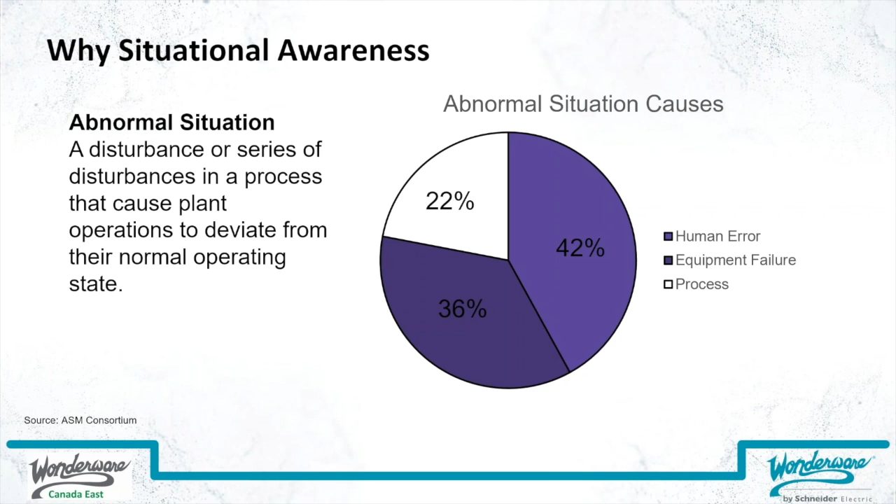So when we look at situational awareness and all of the things that are available today, today's technology capabilities allow us to do just about anything we could possibly need to do. When you look at the release of ArchestrA graphics many years ago, and the functionality of ArchestrA graphics, being able to tie those very comprehensive graphics to real-world information allowed the ability to create very realistic 3D type equipment. With millions of different shades of colors, things could be in different states with 15 different colors to indicate the different states.

Well, that's a problem for me since I'm colorblind, but the other things that were capable in there is the ability to take that real-world information from a controller that came into System Platform and linked to the ArchestrA graphic, or even other traditional HMIs, and be able to do things like animate flames, or animate flow controls, or show motors that are running, fans that are actually spinning, water that's flowing. That list goes on, and I've seen many examples of this.

I watched somebody in an application, they spent about 2 days on something that was just the amount of water animation that came through a gate in a dam, and how to make that look the way it actually should.

From a manufacturing standpoint, there's this whole move to like paper on glass. Take all the things that were on paper and put them on a screen and make them electronic. Well, we kind of did that years ago in this industrial industry with equipment on glass. So essentially, the example that you really see there is just equipment on glass.

And it had a lot of advantages at the time, because certainly if I needed to add a new selector switch or a new push button, it was a lot easier for me to just put it on a screen, put a couple of rungs of logic in a PLC to make it happen, than it was to punch a new hole in the console and acquire the button and wire the button and put the logic in the PLC. So there were some advantages to it. It was just taking the physical world and the equipment world and putting it on glass.

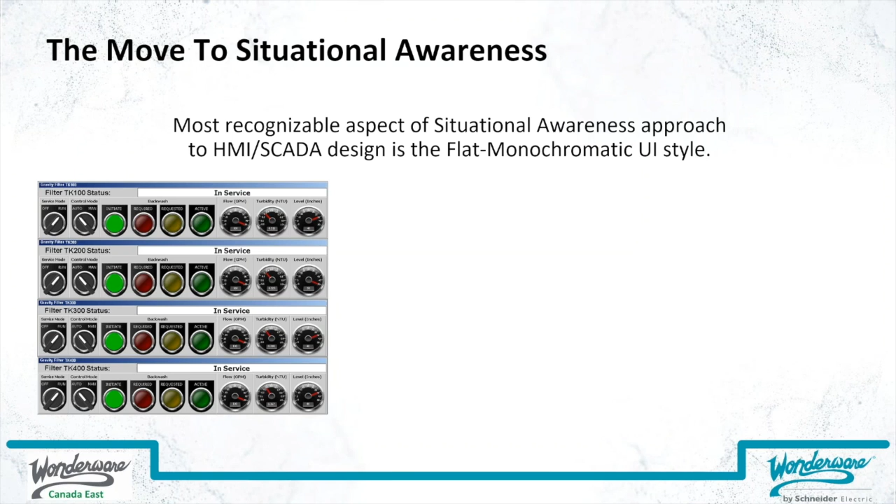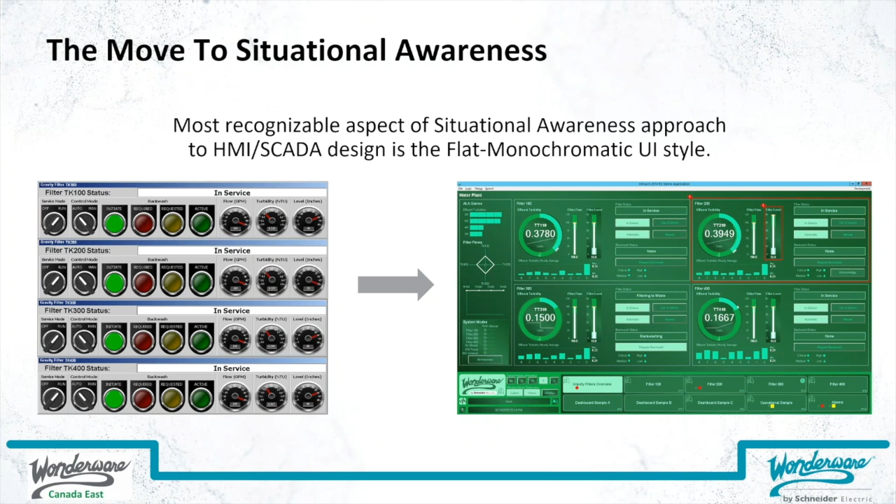Beyond that, it didn't provide a lot more value, other than there could be a lot more information displayed in a smaller area. So when we look at the approach of situational awareness, we see things like this. And we see this design as this flat monochromatic UI style that at first may not look like the best. This is just an example of a demo of a water application.

So when you look at this application quickly, don't worry about the colors, because everything that we do within the ArchestrA environment and the situational awareness graphics is all theme-based. So you can determine what the content is going to display with a simple switch, and you can change your entire application. So this one happens to be this kind of green monochrome, but it could be gray, it could be blue, it could be any colors that you want with a simple switch of a button.

But when you look at something like this really quickly, your attention is drawn to filter 200. Because we utilize some of the alarm severity capability that's built in the System Platform, and that capability being based on functionality written up in the standards, which I'll talk about the references at the end, we immediately tell the operator or the user of the screen that, hey, there's a problem with filter 200. And then I immediately move and look at the level, because that seems to be what's in the alarm.

And of course, if you happen to not be colorblind, you can see it's red. If you are, then that red diamond, just the diamond shape with the number 1 in it, tells me that, hey, this is a severity 1 alarm, and it's something I need to deal with.

If I was not on this screen, down towards the bottom of the screen in the navigation area, I can provide that same information. So I can see on the filter 200 navigation button that there's a criticality or severity 1 alarm in that area, and if I click on that, it would bring me directly to that detailed screen, or I happen to be looking at the overview screen so I can see that information as well.

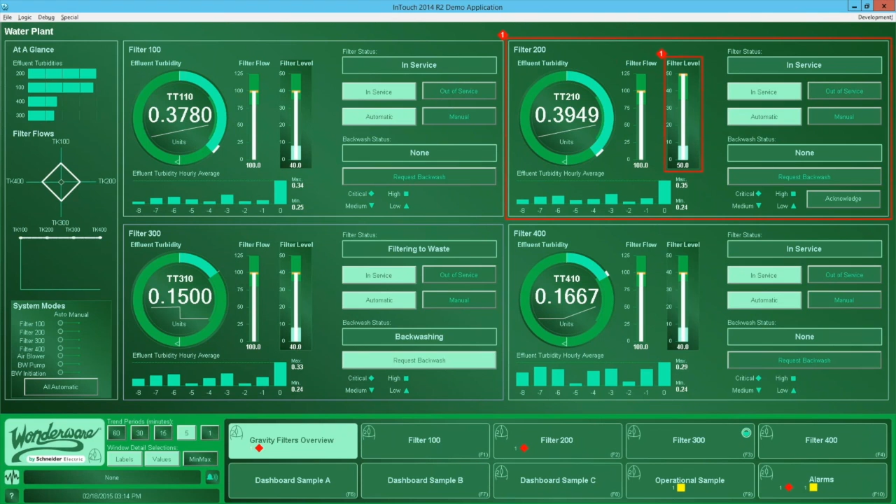So a lot of these concepts aren't really new, right? If we go back and look at some funny things from the past, and you think back to some old Star Trek episodes, you see people sitting at consoles, and those consoles were completely made of glass, and they're sliding and swiping their fingers across things. Back then we kind of thought that was science fiction, when now we all walk around with these smartphones and do the same thing every day.

So where does this kind of fit into what we look at today? That's kind of a model approach to looking at the equipment. So level 1 being an area-wide overview, right? That's something like if I was the entire space station, then that would be the level 1 area-wide operation. What we may have just been looking at would be maybe a facility-wide overview. So it's just the shuttle bay operation.

So, at level 1, I have a goal when I'm going to look at something, and I want to see KPIs. I want to see some summary status. I want to see things that me as a manager or as an upper level person in an organization, in that whole area of the plant, what is it that I need to deal with? What is the situation that I need to go in and react to? And then the level 2 facility-wide is basically key operating screens, any kind of specialty pages around what's going on in that particular area of the plant.

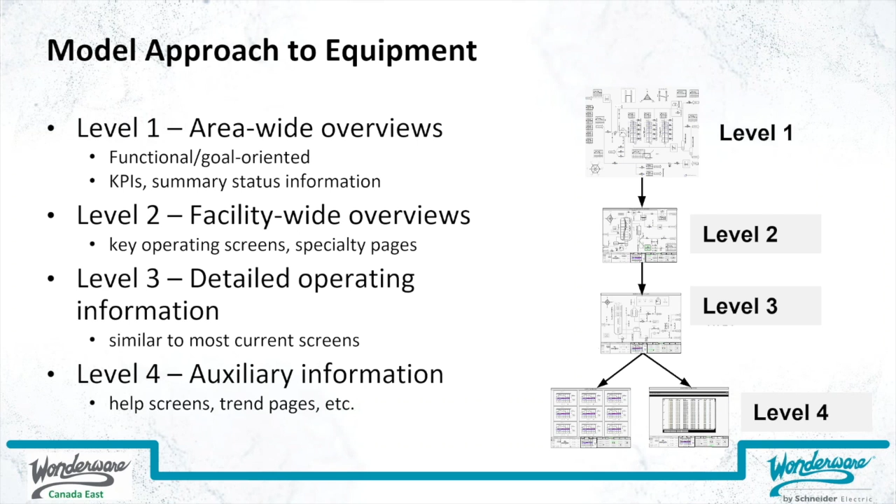So that's something that you'll see, if you get to go to Orlando or you get to come to the upcoming shows in Toronto and things like that, we'll show a lot more detail about this. But how all this information can be automatically related in as part of the model and part of the next generation visualization.

So when we look at the information or the data that's available, data really doesn't do anything for me without any context. By the way, it's 70 degrees. And that doesn't really matter to anybody because you don't know where I am, and you know what the temperature where you are might be. But there's no other information around that. And you don't know the humidity and you don't know whether I was talking about Celsius or Fahrenheit. So without any context around that, it really doesn't mean anything. And when you do that, you force people or operators to try and remember things, search for things, or even worse, make calculations or interpretations on their own on the fly, which could run into problems. So data without context isn't very good.

The pressure is 989.7. What pressure is that? Well, it's just a pressure indicator. I don't know where it is. I don't know what it's supposed to be. I don't know what it is if it's bad. It could be, 990 kPa is a really bad number. Well, I don't know that by looking at this, but I'm very close to that. So how far is it from my set point? Is it close to being alarmed? Is it inside my normal operating range? These are really, really important things that I need to know to be able to make decisions.

So at best, this is an inconvenience because I have to do this interpretation of that data myself and turn it into information within my brain. But during problems, it just relates to a slower response time, which causes more problems. So things start to cascade as there are problems with the system. So being very aware of the situation is always going to allow me to react faster to any kind of upset in the process.

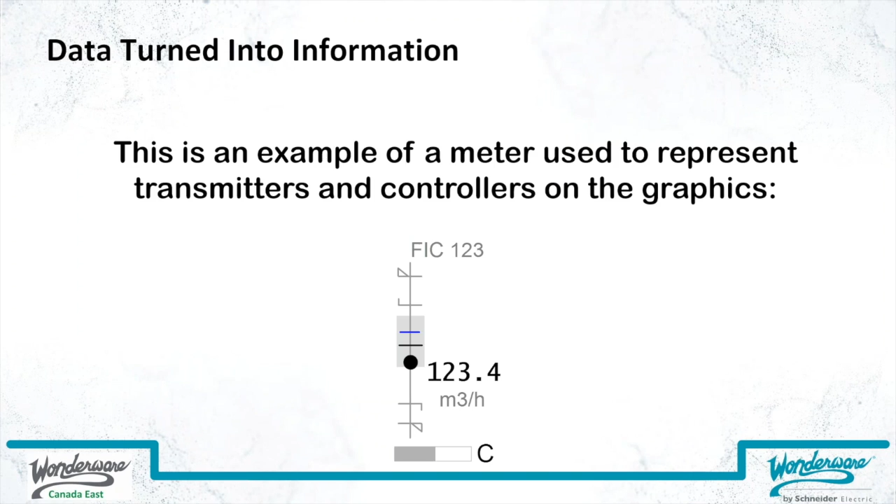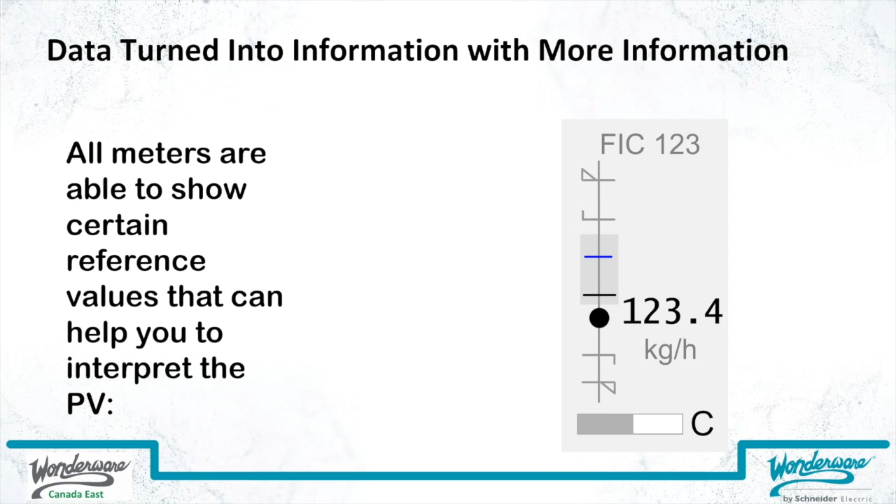And all of the meters within our library show certain reference values, and you can determine what detail of these values you want to display. As a matter of fact, with next-gen functionality, you have the ability to display things based on the visibility level of it. So if I zoom into something, I can display a lot more information. If I'm zoomed out and there's a lot of things on a screen, I display even less information. So all of this stuff is built into these graphics. So all of these things help you interpret the value.

This meter, there's my high high alarm. There's my high alarm. There's my tracker. This is my set point, it has recently moved. Here's my set point. There's the actual value. We can see it at 123.4. There's my low alarm. There's my low low alarm. And at the bottom, the C indicates to me that it's a loop and it's in cascade mode as opposed to auto or manual mode.

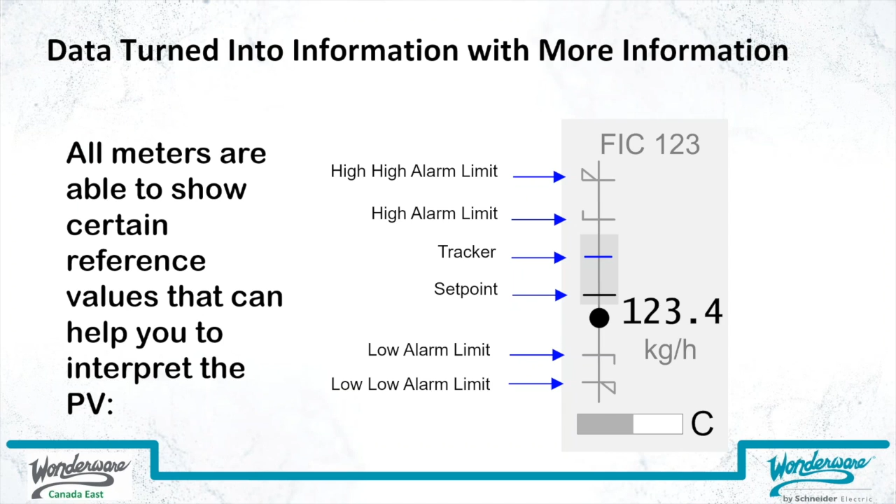So I've taken all of that data and I've really turned it more into information. So I can see that gray box is my normal operating range, and then there's my value, and it's outside my normal range. So there's a lot of data that's put together in this display and really displayed to me as more information. And that's because of the mind's ability to interpret the graphics faster than it can interpret numbers and do any kind of calculations on the numbers. So this pre-attentive processing is really the important thing.

So, just some examples of the things that we do within the library. You can use the color hue. So, it's very easy here to look at the first one, and I can see exactly where the difference is because it's red. And the next one using the color intensity. The next one putting in a different shape. So, being colorblind, it's a lot easier for me to recognize that star. Just like my example with the alarm indicator before, it was a lot easier for me to recognize that rectangle than it is the color red, especially if a lot of the colors are the same.

And then there's line length. And there's enclosure, so it's easier for me to see that alarm because a box showed up around the area with the red diamond with a number 1 indicating the severity of the alarm. So orientation and line width and position of lines or graphics or objects, different sizes of graphics or objects, all these things make it very easy for me to see information instead of just seeing different data values on a screen and having to then process that.

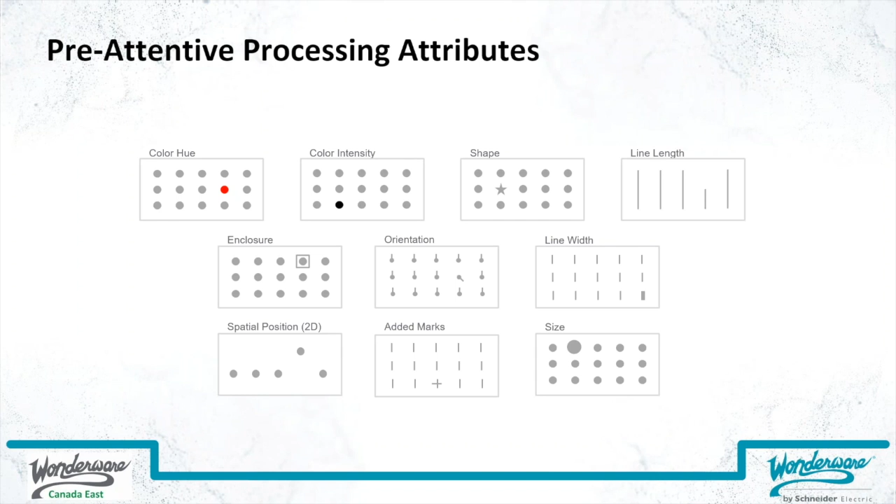So, the example of the alarm, here's an example of a situational awareness graphic for a storage tank and some filters. And if there's a problem here, I may see an alarm appear, and it easily draws my attention to that particular area of my application. And I can immediately tell, based on the way my standards are put together, that this is a severity 2 alarm. So if I get to this and take care of this in the next half hour, I'm probably going to be okay, or whatever those standards that I happen to use are. So I can react to that as needed.

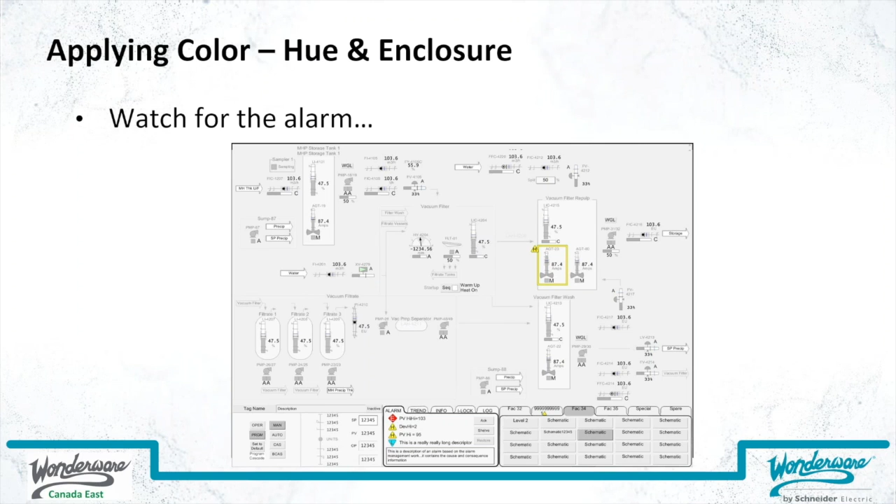So some of the meter components, again, these are all part of the library, so you don't have to do anything to build these. You simply tie them to the attributes that are coming from the control system, and they just function. So here's the same example of that flow control meter, cubic meters per hour there, and it's in cascade mode. I'm just going to do a little quick test here. I'm not sure how it's going to show up on the GoToMeeting, but if I do a quick test, something just appeared on the screen. And if you happen to see it appear on the screen, you probably did a very quick interpretation in your mind as to where that value was without even seeing a number.

So I'm going to go ahead and do that again, and the same thing just happened. You saw something very quickly, and you were hopefully able to interpret it in your mind without having to do anything else. So one more time, let's put one more on the screen. There were three things that popped up there, and each was only on screen for about half a second.

The first one that popped up had that dot showing me where my PV is inside its normal operating range. As a matter of fact, it was right in the center, and it was very easy for me to see, since I've seen it a few times. I'm not sure how everybody else made out on it, but it was very easy to see that it was right within that operating range. The next time it popped up, it was at the bottom of its operating range, and the last time it popped up, it was outside of its operating range. So it was very easy for me to see that.

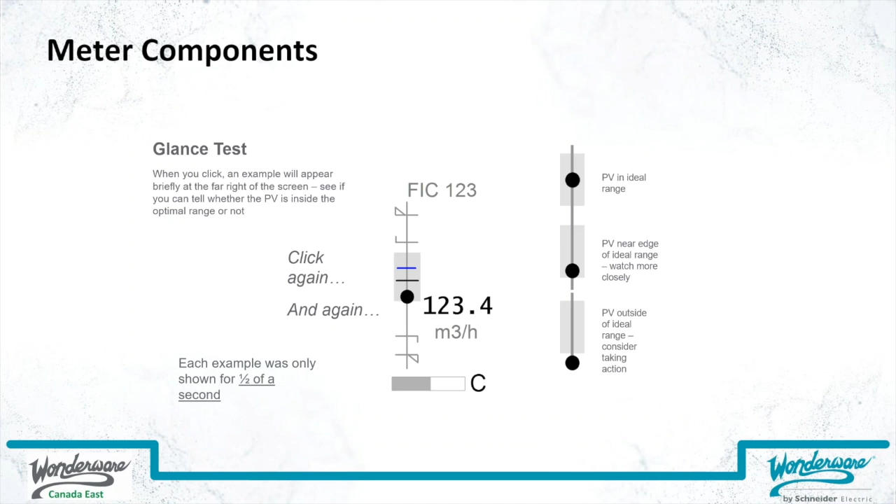From a trend standpoint, trends are very effective for attaining the level 3 type situational awareness projection, as in, I'm looking at something and I can see where it's been and I can kind of see which way it's going. So a trend is very useful for that. There's a lot of trending capability that's been built into the situational awareness.

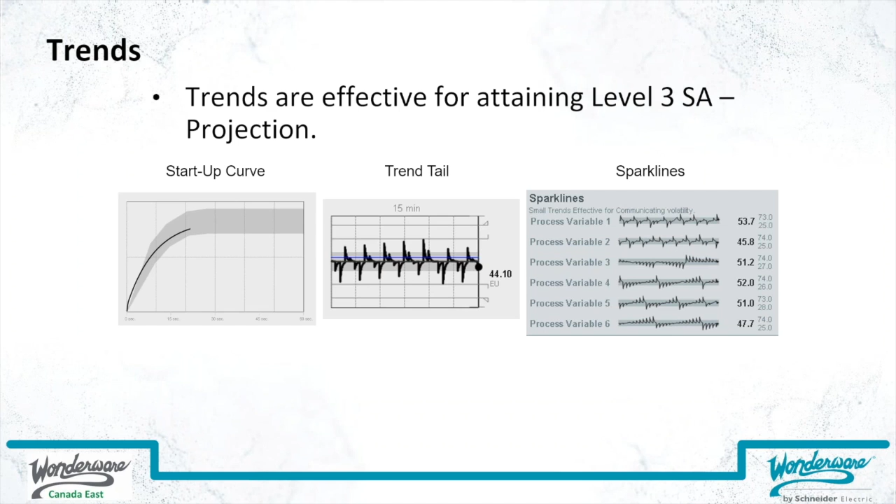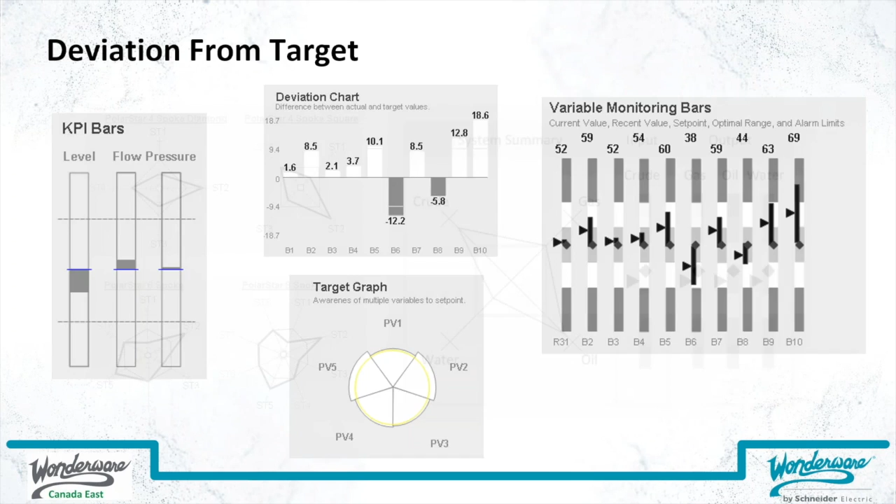The next one is one of my favorites, the Polar Star chart, which allows me to see where things are deviating from target. The important thing about all these graphics is they don't require you to reconfigure them at all—they're smart enough to adapt to the values or attributes you add to them.

On the left-hand side, you can see different 4-spoke diamonds and squares, and 6-spoke and 8-spoke Polar Stars. Over on the right, there's a system summary in a square polar star, showing values: crude, gas, water, and oil. Those are four completely separate process variables with completely different set points and engineering units and scales, yet when put into a polar star, they'll automatically scale to whatever their operating range and values are based on the engineering units and attribute assigned.

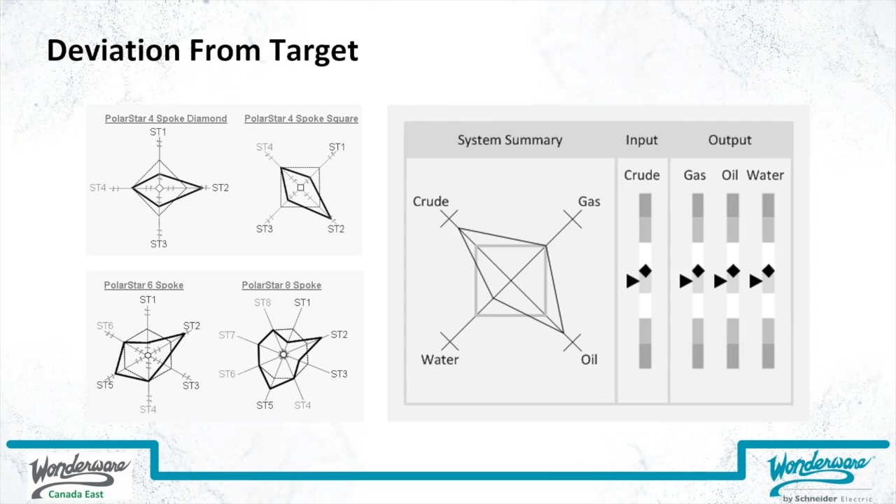So there are a lot of different ways of showing these deviations from target that make things a lot easier for an operator to see. There's a very extensive library of these symbols, and it will continue to be enhanced when we come out with the next version of System Platform.

There are actually a lot more situational awareness graphics that have been added to the library, extending its capabilities. Just to quickly go through some of the things—you can see from all the folders listed there, all the symbols available. There are some alarm symbols: an alarm history page, an alarm banner, a runtime page, an alarm light, and severity light. Those are all things utilized within those graphics.

The little red diamond that shows up on buttons for alarm severity—that's one of those already pre-built graphics. The alarm banner that showed up on one of the earlier graphics is there too. You can see some unitizers, to display equipment ID or a meter marker. Those things are already there, so you can build everything with these pre-built symbols—you don't have to create any of these yourselves.

Some electrical symbols too, like an electrical reactor, transformer, those different symbols. For inputs, you always need a value entry, maybe a numerical value entry that somebody clicks on to enter a value, and it has everything built in to display it correctly, dealing with engineering units, min and max range, and all those things. Page navigation buttons have already been built in, so you can use those to navigate throughout your model. Text entry, if I'm just entering text, again takes into account what attributes have been added to it. And then the different meters—we went through some of those already.

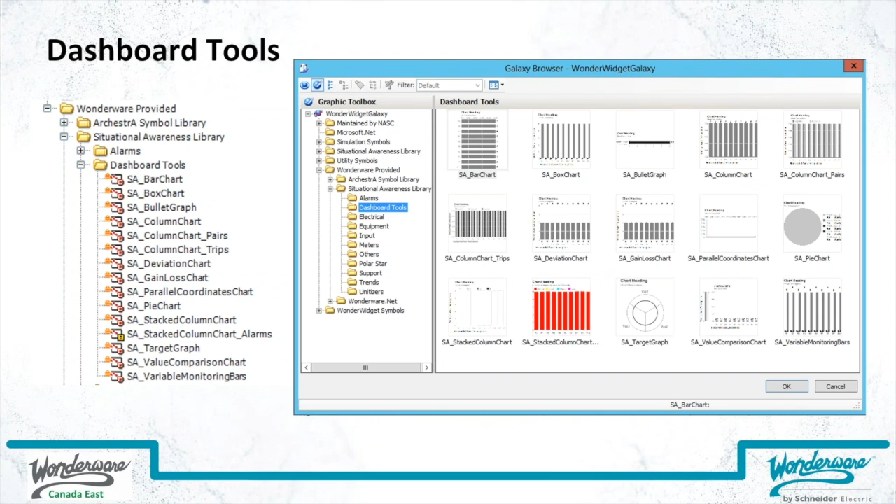Because of the wizard selections, the way they've been built as symbol wizards, you can drop them down and tell them how many points or how many bars that they need, and all of that configuration is simply done within the wizard environment. I'll show you some detail about that in another example in a little bit. So there's an example of the dashboard tools.

Here's the polar stars that I mentioned - the different polar stars that are available here, the 5 different ones that I can just go ahead and select and put into an existing application.

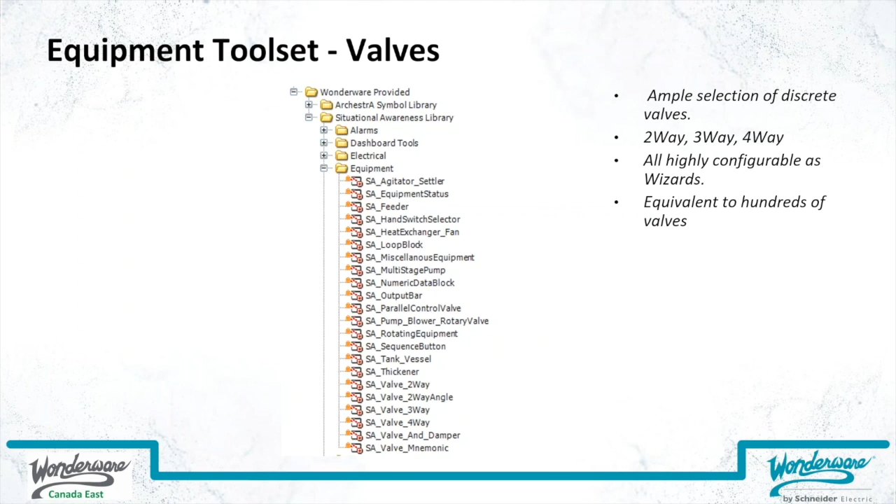Equipment tool set, so valves. There's a very ample selection of these discrete valves, and everything I'm showing you here is currently released software. As I mentioned, the next release will have even more permutations of these different graphics and things that are available. So there's the two-way valves, and these are just examples of those valves being dropped on the screen.

So I can see a solenoid, a digital, a rotary, a diaphragm, spring, manual - the different body types on the valves.

So my two-way valves - here's all the different two-way valves and how they can be oriented. The different three-way valves that are available, same thing, and how they can be oriented. And the same thing with the four-way valves.

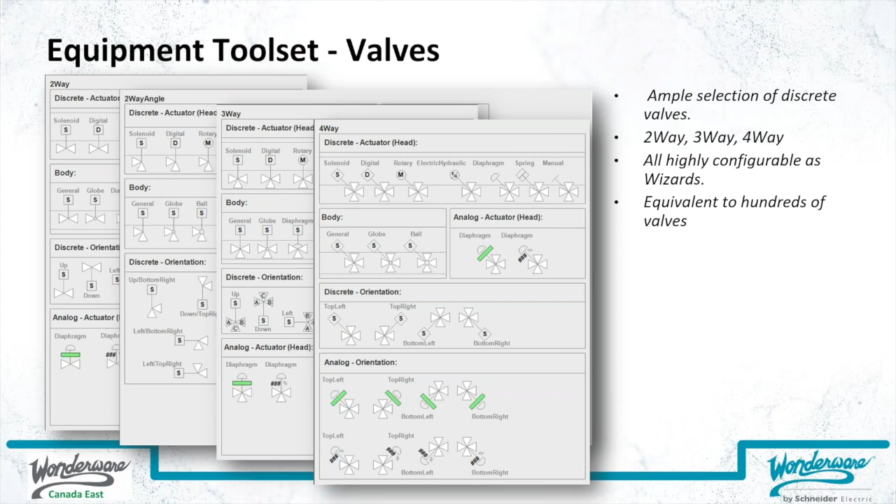So literally, this is equivalent to - hundreds is probably too low of a number - hundreds, even 1,000 different permutations of these graphics that can be dropped on the screen and simply tied to your existing attributes without you having to do any other extended engineering to make them work and operate.

Trending, I mentioned, is another thing that's available as part of the library, and I kind of showed that when I talked about the different trends earlier. So you can see there's the Situational Awareness Trend multi-pen, Situational Awareness Trend single pen.

The interesting thing about these trend pens is they were designed with performance in mind. What I mean by that is if you look at one of the most powerful things available in an HMI SCADA application, it's also one of the most expensive - and that's not from a licensing cost, that's really from a resource cost and a configuration cost, the most expensive to deal with.

Meaning that if I want to trend 5 different values, in most cases I have to have some separate object that trends those values for me and retrieves those values from some long-term storage location, unless it's just a very simple short-term real-time trend. From a complexity standpoint and a processing standpoint, that can be rather expensive.

So I can't go to a large overview screen and drop 100 different .NET controls or ActiveX controls and have them automatically configured based on what somebody's selected and have that operate efficiently.

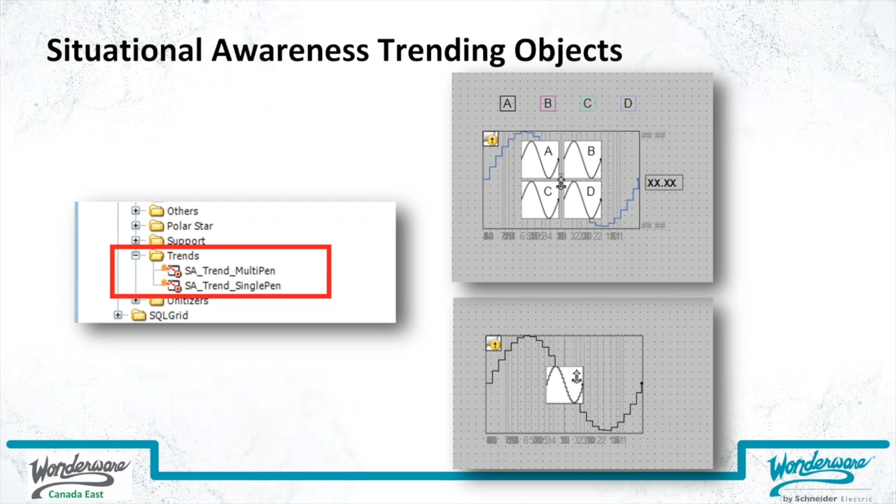So if we look at the entire library, I talked about these 3 major categories already, but there's just a quick listing of the equipment with the agitators and the feeders and the heat exchangers and fans and miscellaneous equipment and pumps, rotating equipment, tanks and vessels, so forth and so on. The meters and polar stars kind of fall into the same type of category with a set point and a deviation from set point type control environment.

And then the dashboard tools with the bar charts and the column charts, pie charts, target graphs, comparison charts, all those different dashboarding tools. They all kind of fit into those different levels that I talked about of graphics within the situational awareness definition. So I'm probably not going to use a dashboarding tool on a level 3 graphic, because a level 3 graphic is probably going to consist of equipment. And it may consist of some of the center things like meters and polar stars, but that's really to provide situational information to an operator who may be using a level 3 graphic, and it's not going to have bar charts and column charts that have summary information and key performance indicators for an entire area or an entire line or whatever that might be.

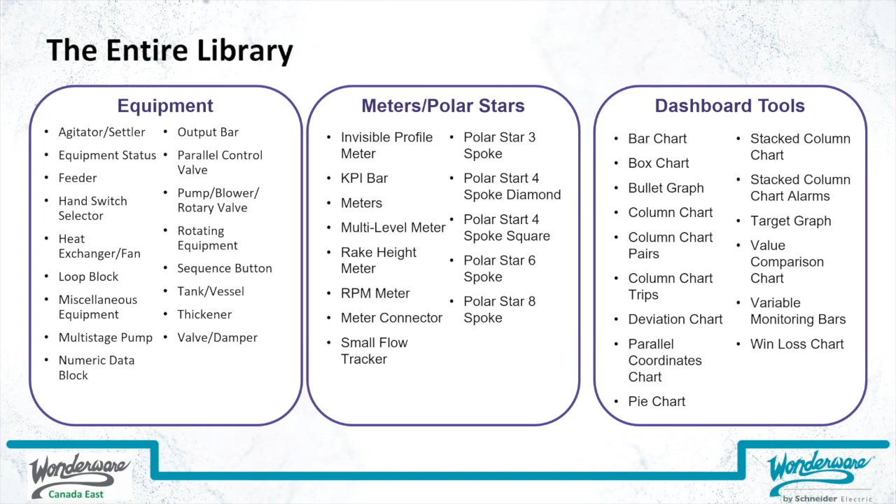So when we look at this, there's 100+ wizards or so in there, and even more, like I said, with the next release. And the way the wizards are built with all the different combinations, there's somewhere over, maybe not in this release, it might be slightly under, but the next release, somewhere over 1 million different unique combinations of these symbols. And the important thing to remember is these symbols are not designed for somebody to just take and put in their application and take apart and redo. They're designed for you to use them directly in your application, and they have everything built in for you to simply tie those to values that you already have in your application and have them immediately functional.

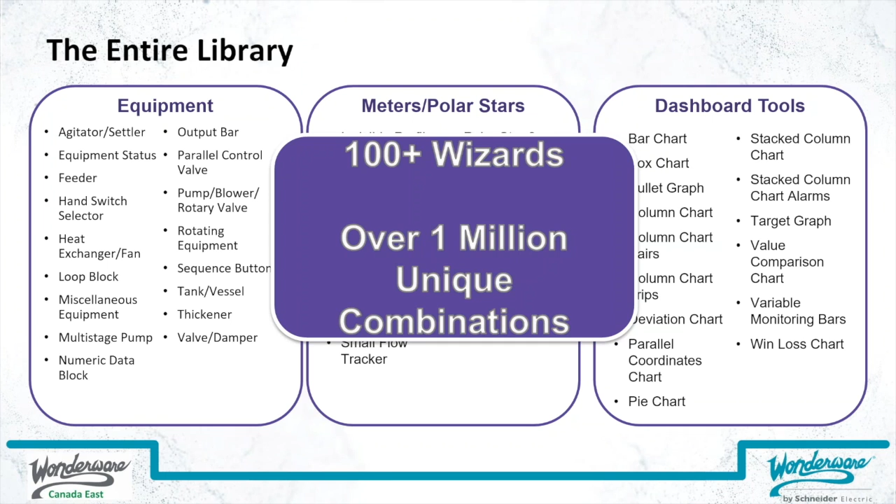So one of the things that I didn't talk about in all of the graphics, I just briefly showed it in the list of all the different symbols that are available, is the alarm symbols. So the alarm symbols, one of the changes that we made within System Platform to the alarming a few versions ago was adding this severity in. So under the hood, we added the capability to have severities. And this is important from a situational awareness standpoint. And one of the things that actually came out of this is a product that we have called Alarm Advisor, which we'll save for another webinar some other time.

But one of the things that we realize is, and people are realizing themselves, there are too many alarms in their applications for anybody to really be able to effectively react to those alarms or situations in those alarms, and some of them don't even need reaction. They're really just kind of nuisance alarms. And I loved to see this when I was at a customer's cogeneration plant, and we were sitting in the control room reviewing some stuff, and every 3 or 4 minutes some alarm blared, and somebody reached over and pressed a button on the screen, and I had no idea what it was. They just acknowledged it. And it probably shouldn't have been blaring an alarm every 4 minutes if it wasn't that important. But it made me nervous every time it happened.

But taking that into account, one of the things we did with InTouch is we had these 999 levels of alarms. So with all these different levels of alarms, since they really didn't cost anything, nobody had to put a light on a board so it lit up when there was an alarm. They didn't have to drill a hole and get the light to put on the board. They could just check a box and say, yeah, this is an alarm, and here are its limits, and in they would come. It made alarms very inexpensive and easy to add, so somebody could easily put them in an application without a whole lot of thought. And when we started looking at that we said, wow, that's way too many levels, and people don't really use it. A lot of people say, well, when I have 1 to 300, it's really this priority type alarm.

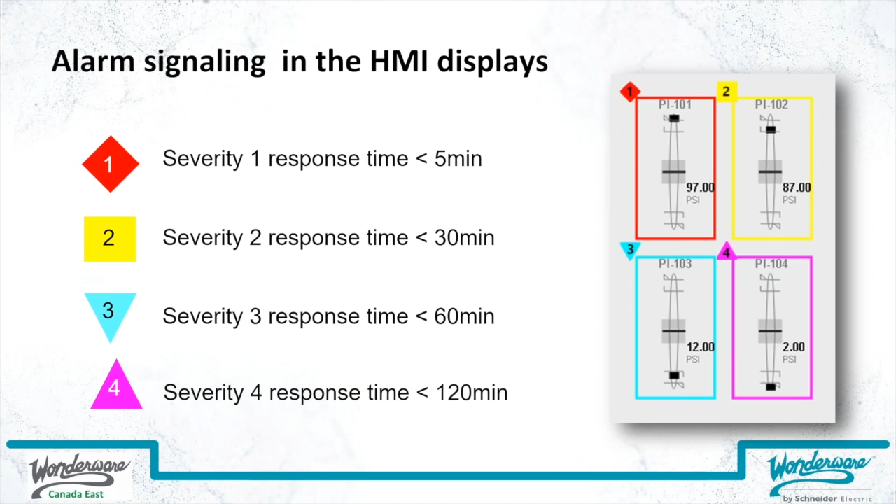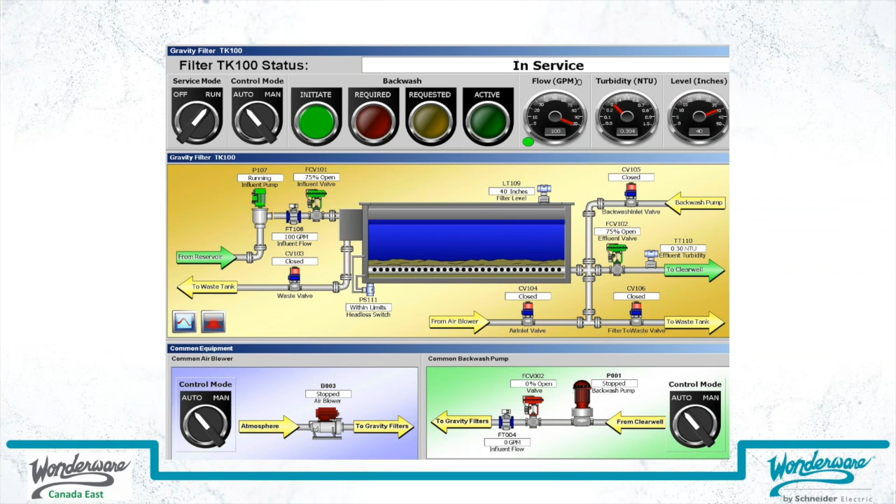Here's that same application redone in situational awareness. I apologize for one of the graphics, because I think before I took this screenshot, I was drilling into the Polar Star to show somebody how it was actually built, which I would hope nobody would ever need to do because it simply works when you just drop it on the screen. But here you can see that whole graphic redone as a situational awareness graphic.

So I can see my key performance indicators for the influent flow and the valve and the filter level. I can see that my effluent turbidity is rising there. It's very easy for me to see that sparkline tells me, hey, that value's been going up pretty quick over whatever period of time. And then I can see the meter that has the turbidity over on the right-hand side that shows me, yes, it's within its operating range.

And then there's that Polar Star. And again, the interesting thing about the Polar Star is the fact that it has the flow, the turbidity, and the level all part of the same graphic. And it doesn't matter that their engineering units are off. I simply add the attribute to that Polar Star, and it's simply going to work within the operating range of the attributes that I've added to it.

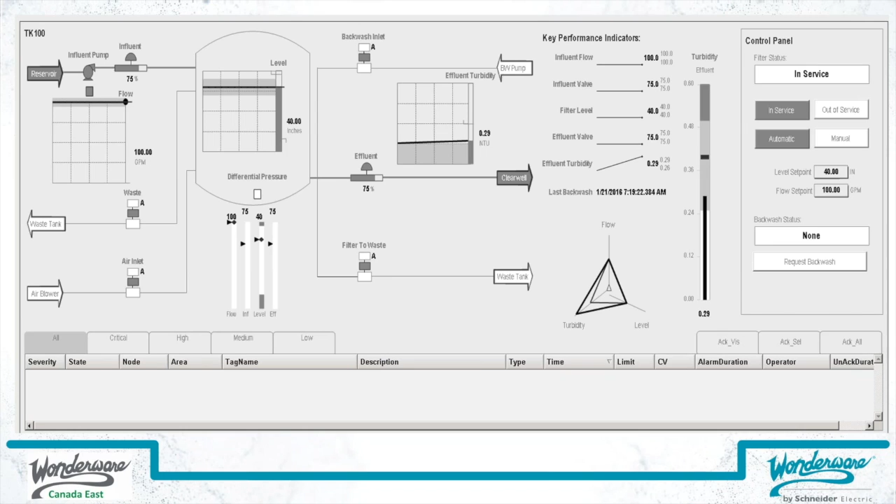So that's just an example of something moving from a standard 3D type graphical application to a situational awareness type application. And again, it doesn't have to be this drastic, and I'll show you an example of that in a minute as well.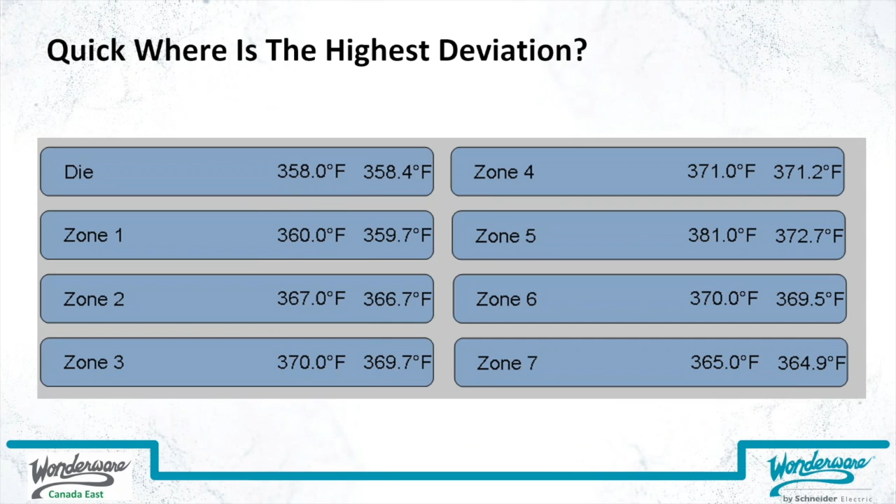Pretty simple that you're going to tell me zone 5 in half a second. But if you go back and look at this one, you can see that zone 5 has a setpoint of 381 and its PV is 372. You probably had to start on the left-hand side and do the actual calculations in your mind to determine where they were and how far off from set point, whereas this one immediately tells you that that is the zone that's out of spec, and maybe I'd have to deal with that.

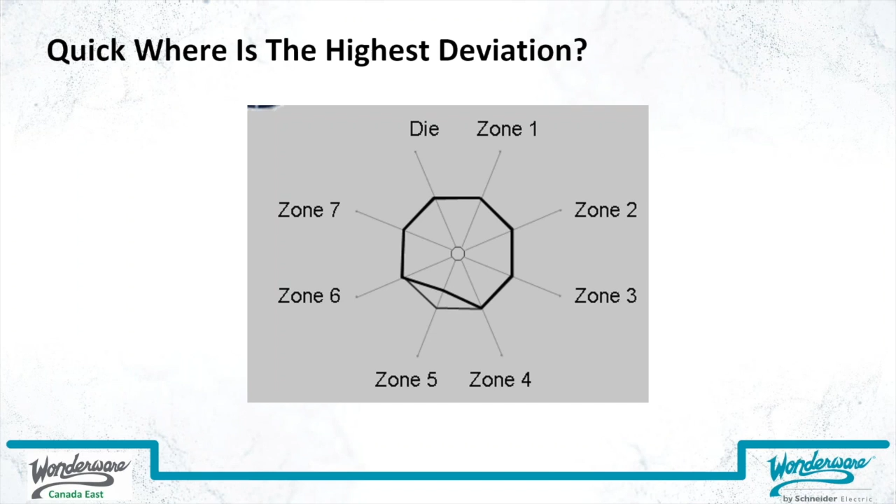Again, there might not be an alarm. If there was an alarm, I might have a border over that spoke, a red border telling me that there's an alarm or a problem with that. But it easily tells me that there's a deviation between the set point and the PV for that particular value.

The other thing that's important here is, again, I don't have to do everything. I don't have to make the drastic change of the water application that we just saw earlier. This is something that I did for an OEM customer where they said there's no way they could get their customers that buy their equipment to switch from what they've been using with pictures of the machines on it for many years to something that doesn't have those pictures anymore and had the situational awareness functionality. So it was, let's look at it and let's put situational awareness graphics in it that don't take over the application, but see what the feedback is and see what the operators like better.

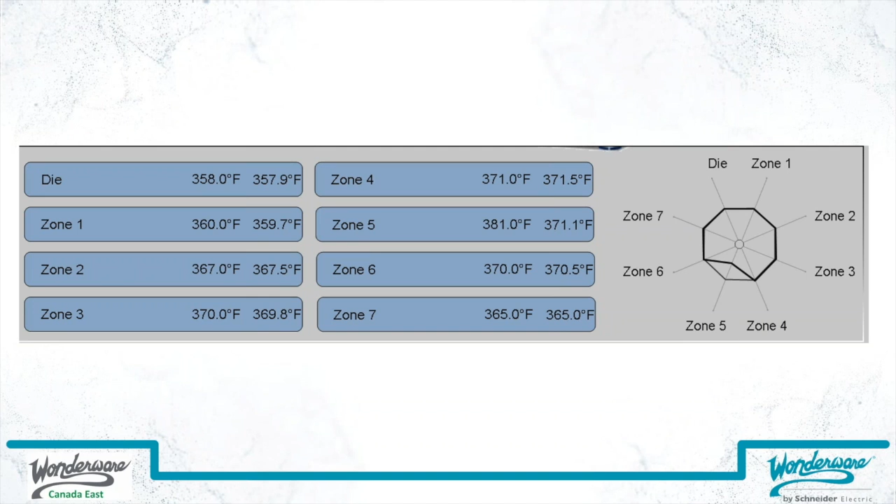I tell you what, if I was an operator, and I used to actually do some control work for extrusion machines, these were some of the things that I really wish I would have had the capability to do when I was doing it years ago. Now, this capability has been there forever. We've just made it extremely easy now, and we've built it all for you, where you just have to drop it into your application. So again, really quick, I can see what's going on.

So, the best of both worlds: if you look at this example, this is that injection molding machine, and I can see what my temperature zones are. My previous example had the set point right next to it, so I could see what the set point was. In the current version of the application, I just have to hover over the number or click on the number to see the set point, but I can very easily see the deviation over on the side.

So if I was just to walk up to this piece of equipment and press a start button and the temperature zones started heating up, it may look something like the polar star that's over there on the right. So I can tell how far I am from this thing actually being ready for me to run. It's going to look more like something like this when it's ready to run. So my temperatures are all within the tolerance that I've defined within that situational awareness graphic.

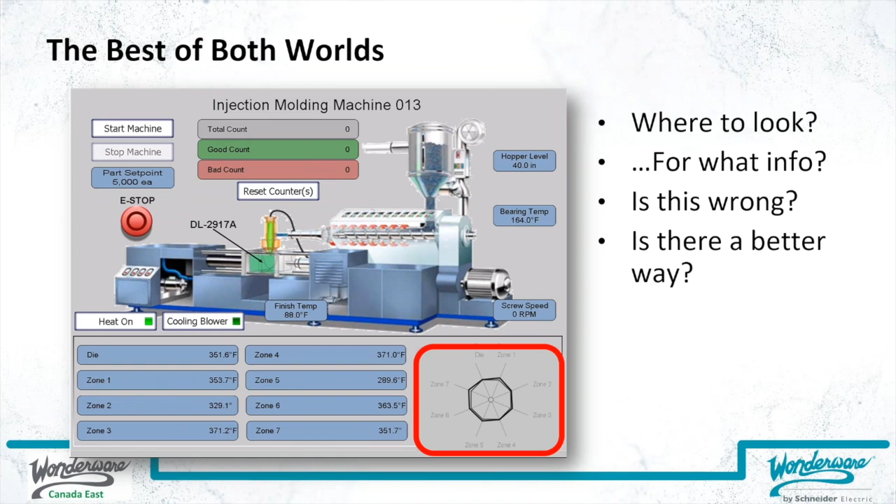So, is it wrong to do it the other way? No. Is there another way to do it? Yes. Is there a better way? Yes. There's also combinations. Doing both doesn't have to be any kind of a drastic change.

From a configuration standpoint, this is what the polar star looks like. If you've been in the development environment and you've done anything with ArchestrA graphics, I simply went into my injection molding machine template and I dropped in the 8-point polar star because this happens to be an 8-zone injection molding machine. When I dropped it in and double-click on it, I have these wizard options. The wizard options allow me to say, yeah, I want it to be normalized, I want it to have a label, I want a custom property-based label, and I want to turn on the status indicator for everything, so if one of the values is bad, it'll show up with the wrench or whatever the status is.

I don't have to do anything other than turn on these wizard options in order to be able to do this. I want to have alarm borders on all the different spokes. And once I've turned those on, it says, here's all the values that you need to tie to it. So I simply tie my temperature zone PV to the different spokes.

So my alarms, my PV, I give it a label, and then I tell it the tolerance, because I don't really want that thing to have the whole tolerance of my temperature that swings from 70 degrees to 500. I just really want it to show within tolerance whether it gets in 5% or 10% or 15% of the set point. So I can set that value for all the different zones as well. It all normalizes everything itself.

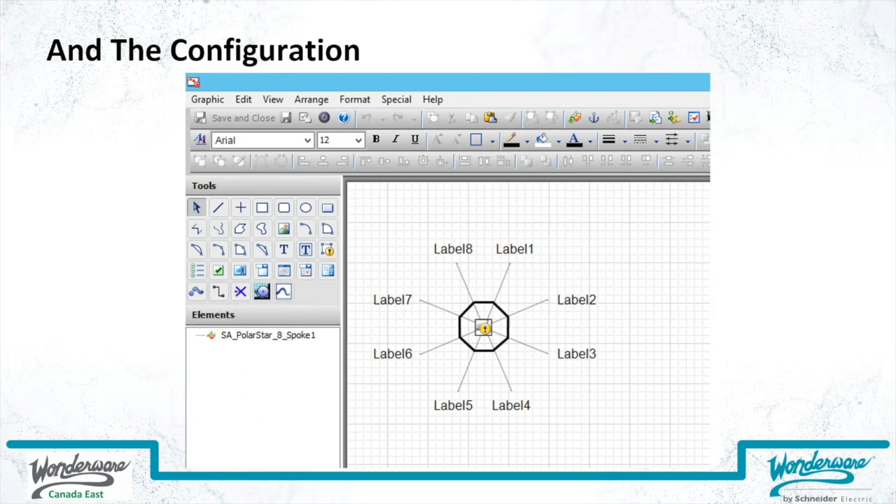So they had an application, and their application didn't look much different than the water application that we looked at. So this is a traditional, let's call it a level 3 operator interface, or HMI, or SCADA display. So these operational screens in most applications, they evolve over time, right? There's equipment added, there's more equipment integrated, there's more graphics added to the screen.

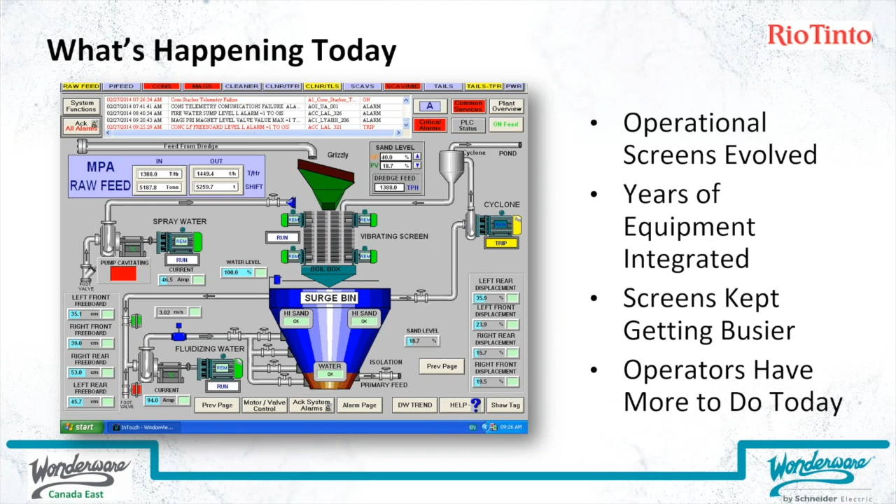So the first version of this 18 years ago may not have had all of the same stuff. Maybe it didn't have the left rear displacement and the freeboard configuration in there. The screens kept getting busier. The operator had more things to do. So there's more and more things that the operator needs to do today.

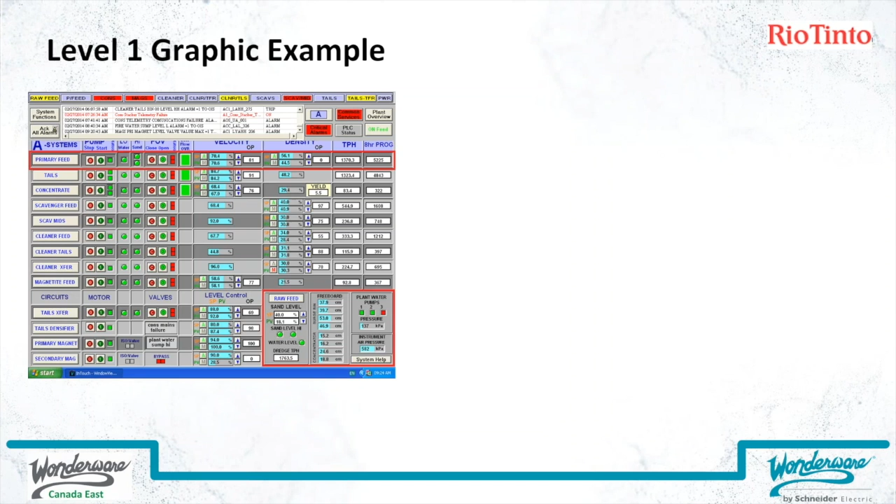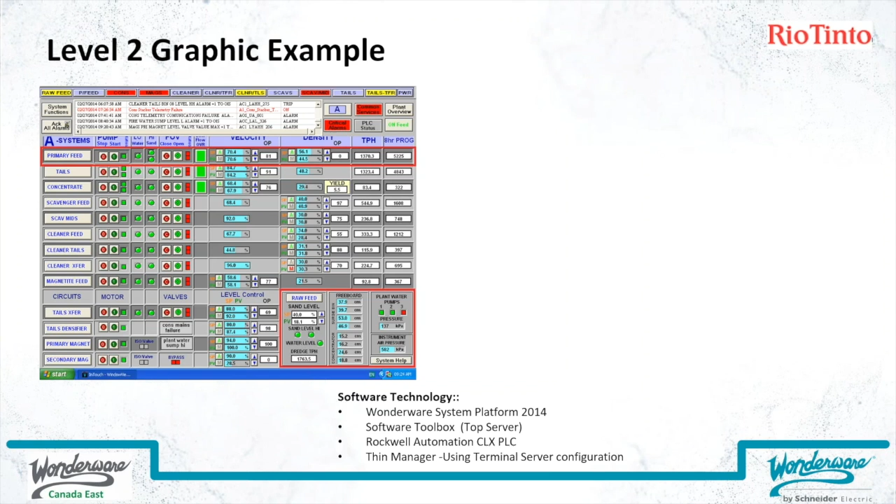So a level 2 graphic example, same thing. Level 2 pulled out of this graphic that they just called their overview graphic with now an entire area of the facility. So the level 3 graphic is more of the operator's graphic. So this is the first one that I showed, and over on the right-hand side, that's what they've evolved to display just about everything that they display for the level 3 graphic that you see on the left-hand side. Much easier for the operator, much easier for anybody who doesn't even know anything about the process to go and look at it and see where the process is.

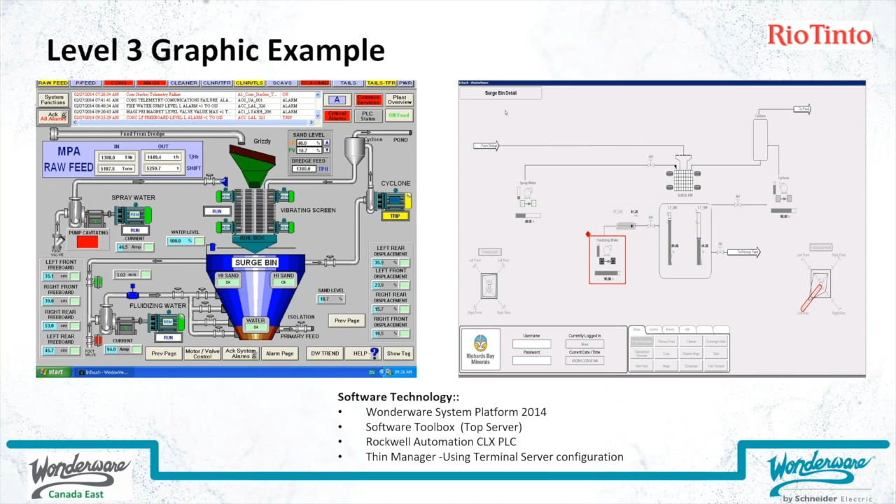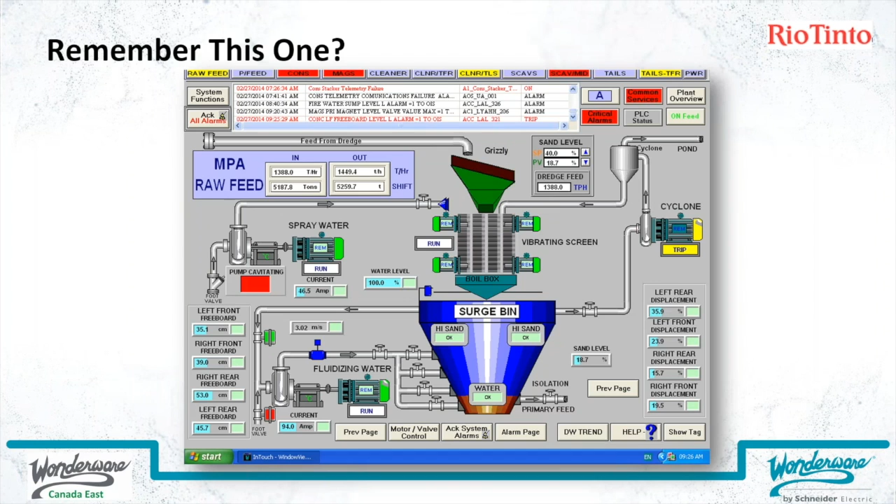So these are just some other examples of how they evolved that graphic. They had to break it down into a few different graphics to display the same information, but those graphics were targeted at different audiences, so it was fine that they were different graphics instead of having a single graphic that everybody looked at. So remember when I brought this one up. There were some graphical changes, right? It turned from that into this. So there's the old one, there's the new one.

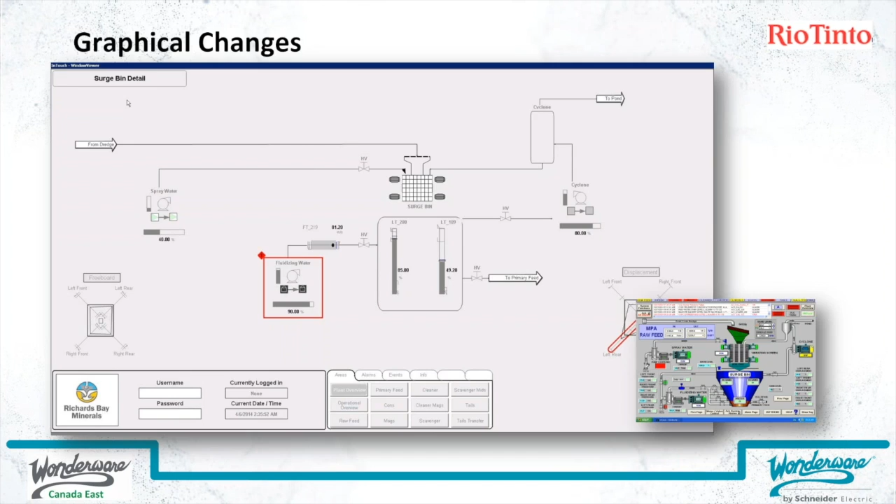There's a couple of things over on the right and the left-hand side that I just want to drill into a detailed example of. So if we look at this, this was this left rear displacement. And this is the way graphics were built at the time. We had this 3D capability. So this particular graphic was turned into this one using a polar star. So the polar star is indicating all of the same information that the graphic on the left is.

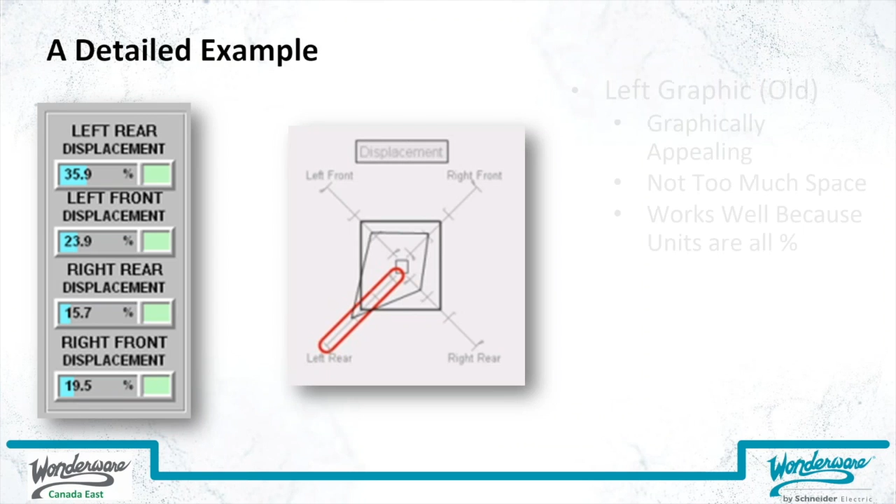So the left graphic, the old one, it's graphically appealing. It has a 3D look to it with buttons and bar charts and things like that. It really doesn't take up too much space. It works really well because all the units happen to be percentages, as opposed to if one of those units was in Fahrenheit, another one is in PSI, and another one is some other level, liters or gallons or inches, whatever it happens to be. So the graphic on the right uses the shapes and the patterns.

Takes a little bit less real estate because it's actually shrunk down a little bit more in the application. I tried to scale it up bigger here. And it works with any units, so it doesn't matter if it's all percentages or if it's like we saw in the water application, a turbidity, a level, and a pressure with completely different engineering units. It displays a lot more visual indication of what's going on with the process than the one on the left, and really, in the long run, the whole thing works a lot better.

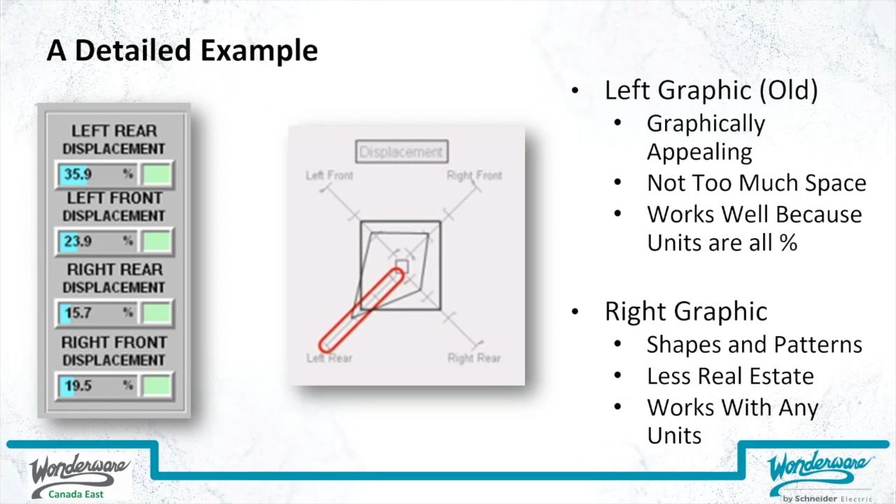So some of the things that they shared back with us, some of the lessons that they learned, is to get input from all the stakeholders. It was really important in that project to do that. So the operators need to be involved in this process. The other one that I mentioned with the OEM, where they went back and they said, no way, the customers aren't going to do it, so they're not going to take this whole thing being done. So they kind of went back to their end customers and said, well, how about if we just do this stuff and you try it out and see how it works?

So these are kind of the important things. The technical solution is really a simple part of it. It's really getting the people involved and the people to adopt it. And in most cases, if you're going to make somebody's job easier, they're probably going to be willing to move in that direction.

So kind of some of the bottom lines here is seeing things faster and easier in any industry and any application really is going to translate to money, whether that's money saved from not having to deal with problems or not having to scrap product, or whether that's money earned based on being able to produce more product or produce better quality product. It's really going to translate into more money, whatever your currency happens to be.

And probably more importantly, it's also going to translate into better safety. Because if I can address a boiler issue before the boiler blows up, long before the boiler blows up, it's certainly a much safer process for me to be able to do that earlier, better than later.

So, again, when we look at the benefits here, these are kind of straight out of a handbook in some of the studies. With a traditional HMI, detecting an abnormal situation before an alarm occurs, that's kind of going back to that early example where I had the set point just outside of the operational area, but it really wasn't an alarm. Being able to detect that earlier by utilizing something like that operational area and the set point just outside of it, it's about a 5-time increase in the amount of time that I can find that issue before it becomes an alarm or another issue where I can deal with it.

So the success rate in handling those situations, about 70% with a traditional HMI, about 96% with a high performance or situational awareness type HMI. So 37% increase over that. Time to complete abnormal situation analysis or tasks, 18 minutes with traditional HMI versus 10 minutes with high performance or situational awareness HMI. So about 41% reduction in the amount of time that it takes to complete those processes.

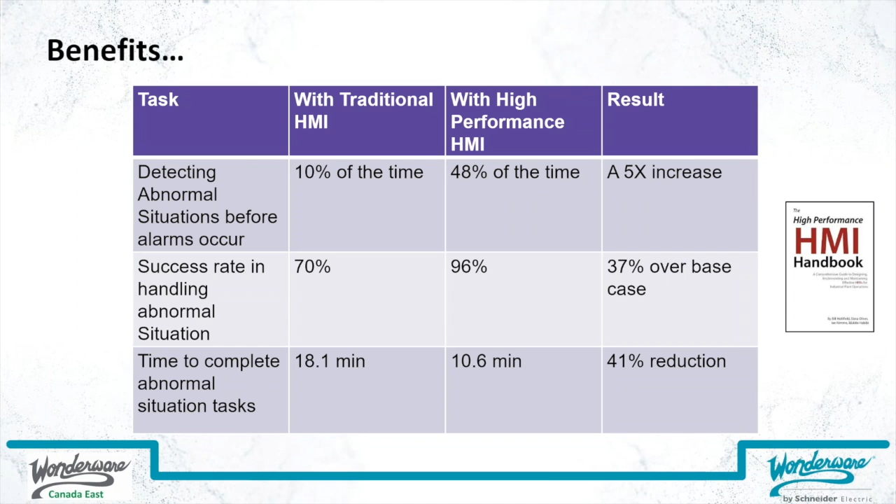So that's pretty much what I wanted to cover.